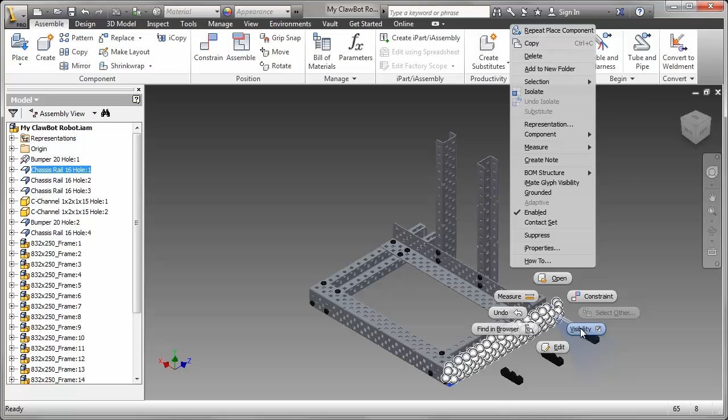Again, we're going to be using mates. Just to make it easier, I've turned off the visibility of that front channel.

Let's rotate that around and get one of those bearing flats into place. Now I know it's going to be in that second hole from the left.

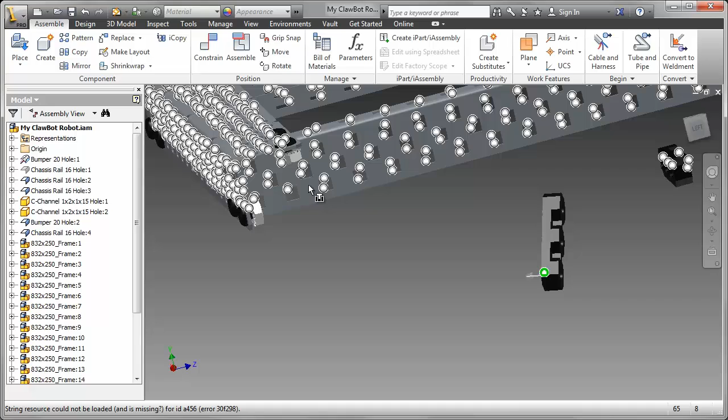Holding down the Alt key, I'm going to select that mate, drag it across, and snap it into place. You can see it just drags around now. For the second one, zoom in a little bit, Alt key, snap into place.

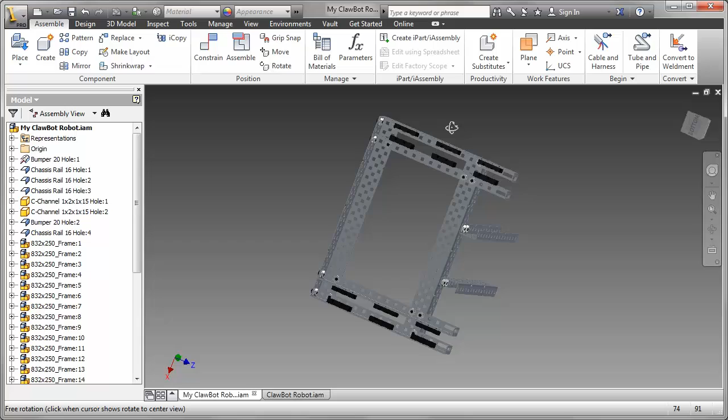I've gone ahead and added all the bearing flats. As I said, there are 12 of them in total, and you can see where I've located those both on the inside of the channels. If you make a mistake on these and put them in the wrong place, of course you can go back and change those constraints.

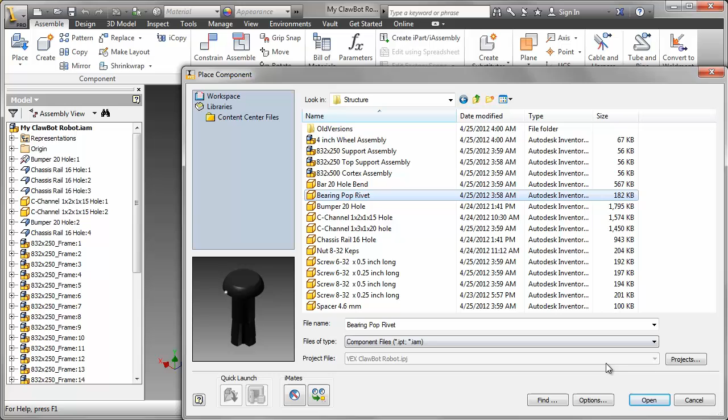To hold the bearing flats in place, we use a pop rivet. We're not going to be adding rivets to all of the holes because there are some shafts and the motor has to be placed. There's going to be quite a number of these, and again we'll use the mates. I'll show you a couple of them.

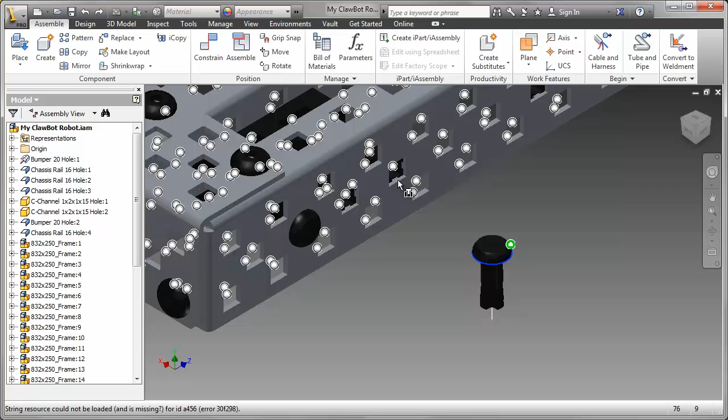So selecting the bearing pop rivet, selecting my mate. I notice there's only one mate left for selection. It makes it much easier because the bearing has taken up one of the mates.

And here we have all the bearing pop rivets in place. Notice there are 6 on this side, similarly on the other.

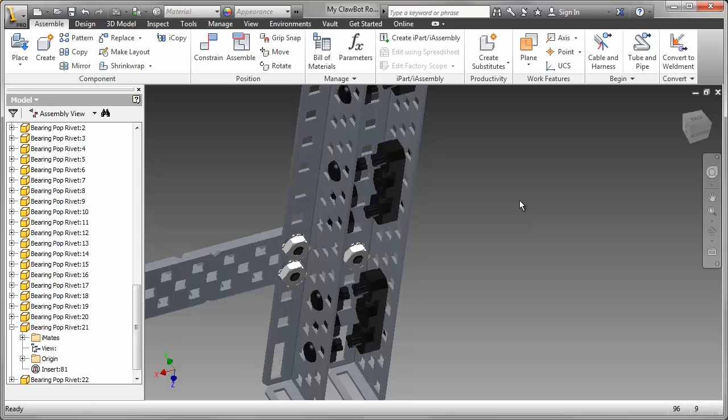It's a little bit different on the inside because we're going to be placing a motor on that middle area. I've placed one bearing pop rivet. I may have to move that later when I bring the motor in, but for the time being I've just placed it in that one location.